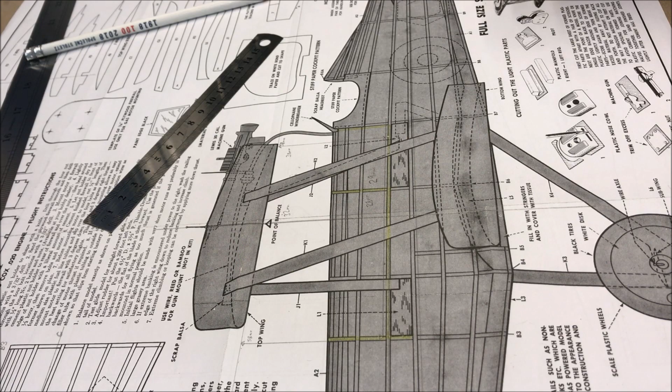Right, I have spent not some inconsiderable time thinking about this. I've not prepared anything, but blimey, here we are - I've made some of the formers in a solid state.

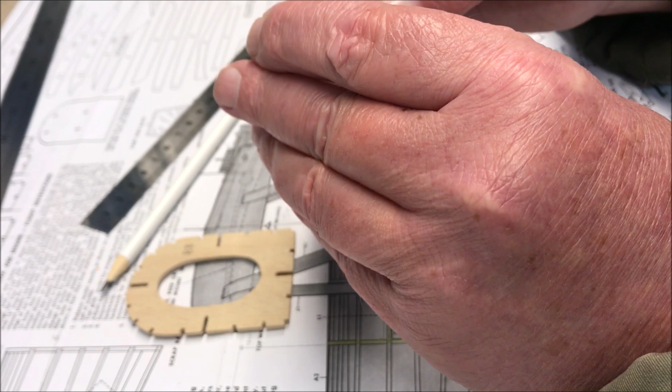You'll probably notice that B1 and B2 are almost identical, but obviously they come up like that. Now I'm going to finish these off sometime today by offering in the bottom bit, so I know where they slot in. So there's 1, there's 2, and there's 3. So they'll look like that. Okay.

I've also done the headrest as well. It goes on there like that.

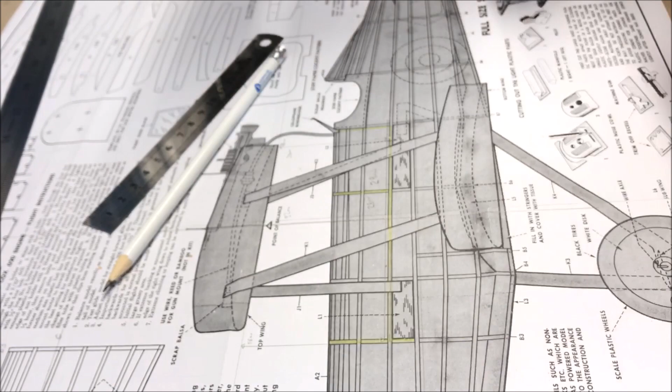Now, put a lot of thought into this, and I did some measuring because I trust these to be good drawings. So I'm going to need to put a hatch in. Now, I did consider going underneath, but I've got the wing here. But I have got quite a bit of space there and here. So I measured it. Now, originally I was going to put a hatch in along here to there.

And I thought, is that going to be big enough? And I thought, well, can I take it to the cockpit? Well, I've got this windshield here, so I can bring it forward to the cockpit, which means I've got to make 2 more formers here.

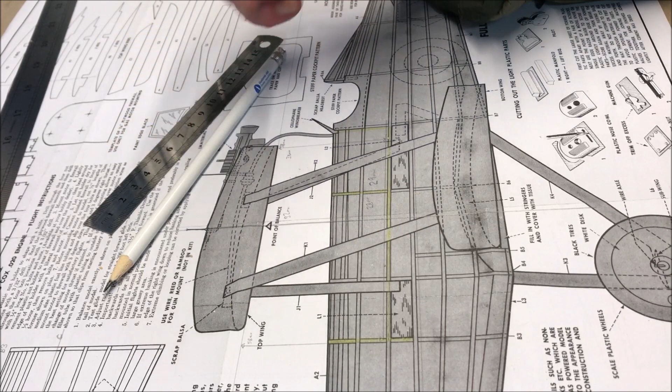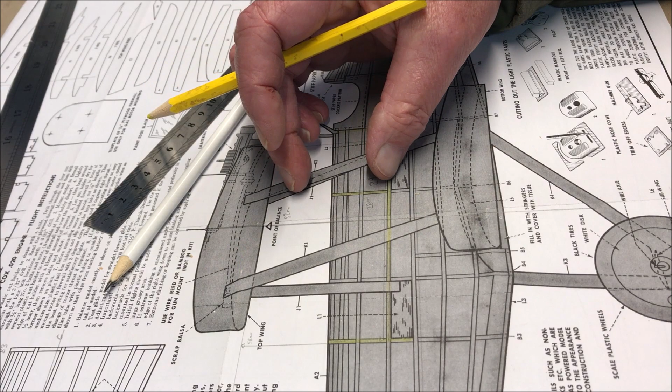Now between here and there, this is 28 millimeters, and I have a distance of 32 millimeters clearance from there to there. So if I do that as big as that, that gives me a 1 mil clearance there.

So I have to lift this up and pull it forward towards the propeller to get this out, and hold it in with a magnet here, a magnet here, depending on how many magnets I've got.

If you are stuck for magnets and you've got a broken motor, take the motor apart - there's magnets inside. They're absolutely brilliant, and they'll be free as well if it's a broken motor. Or maybe, actually, this is not going to be flying that fast, so maybe just a pair of magnets here this side and another pair the other side.

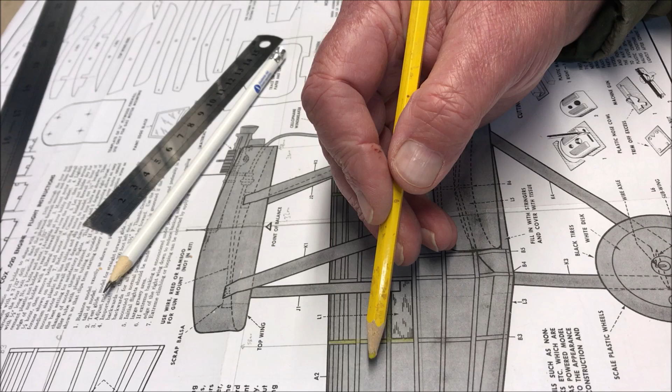And then, probably with a Dremel, take out some of this former here and get the battery as far forward as I can. I want to get as much weight as far forward as I can, because this here is what they call the point of balance. In the UK we call it the centre of gravity, or C of G.

Now, the only reason I've got as far as I have with these is because I've run out, and the shop opens tomorrow morning at 9 o'clock. So I'll be going down and getting some more wood and materials and stuff.

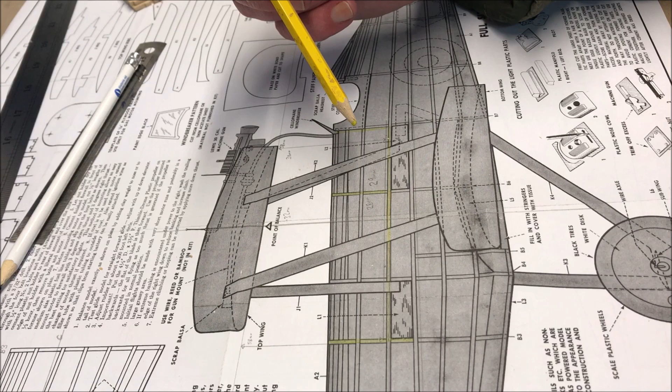And the reason I am thinking of doing certain things is I think I will make a fuselage to the plan, so I know what it physically looks like, and then I can make a second one using that method and then jig out what I want there.

But I do know that I've got to get all the weight as far forward as I can, because I think that tail is going to be quite heavy. So that's where we are with that.

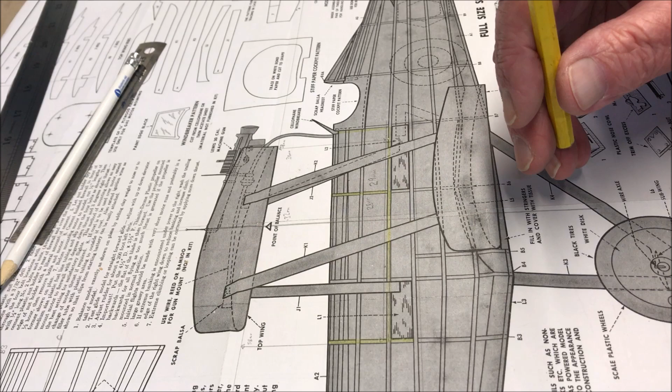Cliff came up with quite a good idea on his Nieuport - something I thought about using a bell crank in the wing to move the ailerons. Now, I haven't dismissed it out of hand or anything, but I've ordered 2 servos that are 1.7 gram. Now, if those servos fit inside the contour of the rib nice and neatly, I may use that.

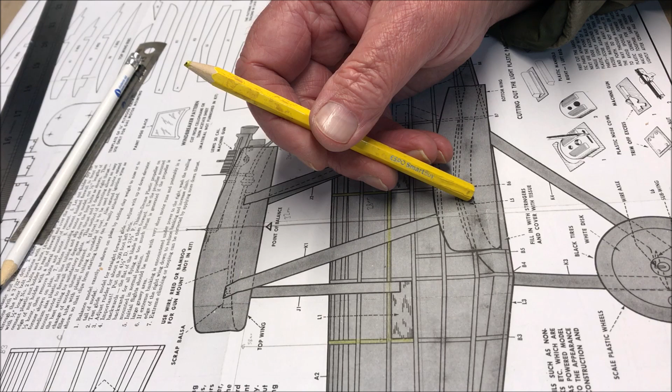If they don't, then I might pinch Cliff's idea with the bell crank, which is going to be a bit more work, but we'll see.

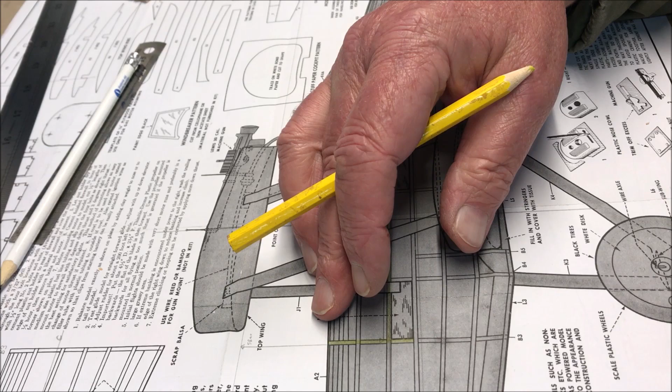So what I'm going to do is construct the fuselage as per drawing and instructions using the original parts, and then as I get momentum with that, will more than likely build a second one using that and compare both. And you know, if I've got enough materials, I can build 2 models out of this if I wanted to. Let's see what happens about that.

It could be quite exciting to do a comparison like that. Actually, do you know what would be really cool? If Tim and Cliff made one of these as well, and we had a bit of a competition, see which one flies the best. That'd be kind of cool. I don't know if they're up for that.

Yeah, actually, I could pinch their ideas and put it on video and use it on mine. That would be so cool if that could happen.

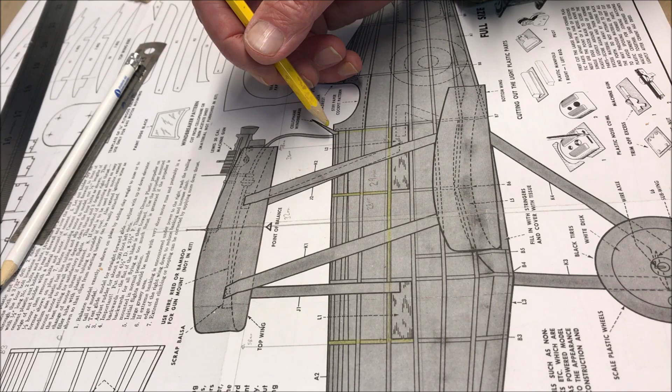Anyway, moving swiftly on. So I'm waiting for the shop to open tomorrow. I can get my servos. I know they've got the ones I want. They haven't got the 1.7, but I've ordered those. They'll get posted probably tomorrow when everybody goes back to work.

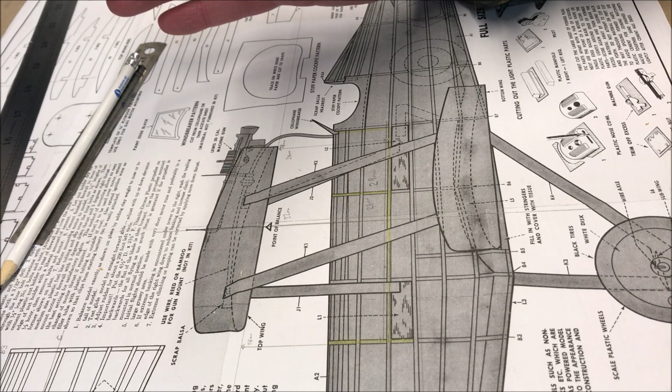And so then I can move rapidly forward. I'm going to start the fuzz, which means I've got to turn this over. And that's where we're going to be at.

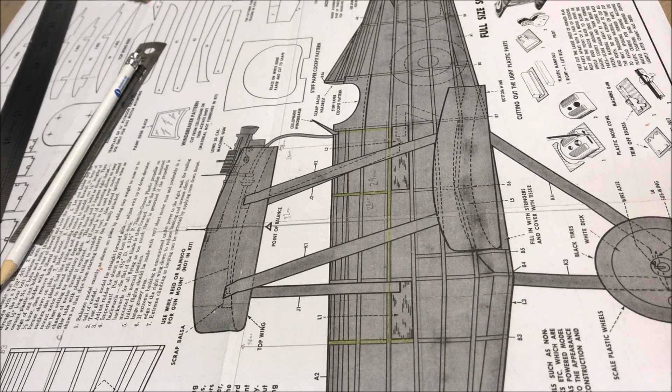I'm not going to look at the wings just yet, otherwise I'll be taking in too much information. But if I get to a certain place with the fuse, then I can look at the wings, because the wings I have to discover. I need to discover what certain things are for, and I think this is for the struts on the bottom wing, and this is the struts here and here for the top wing. And there's an F3, yeah, that's it.

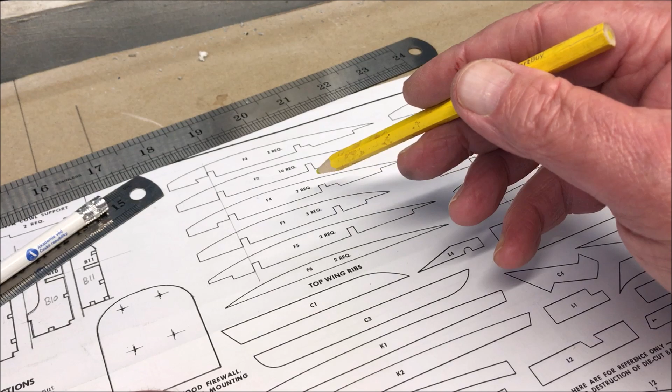Okay, so it's okay. I've been doing a lot of rummaging around. If you can bear with me, I'll turn the sheet over, which is the only complaint I have so far with this.

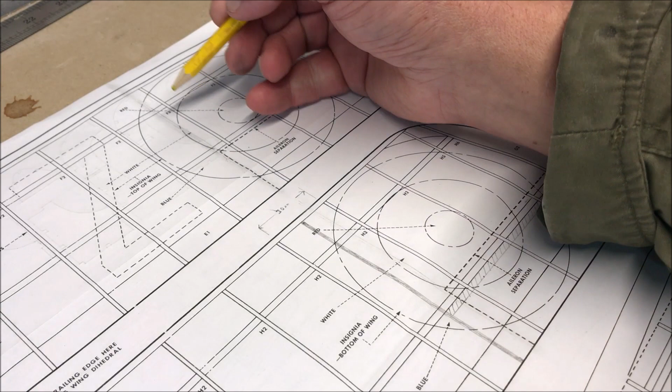This is what I'm thinking of doing. This is H3 and that's F3, so this is where the struts are going to go. I have to cut out the wing rib off the wood there and discover exactly where those struts go in relation to H3 and F3, because what I might do is add a rib here along there.

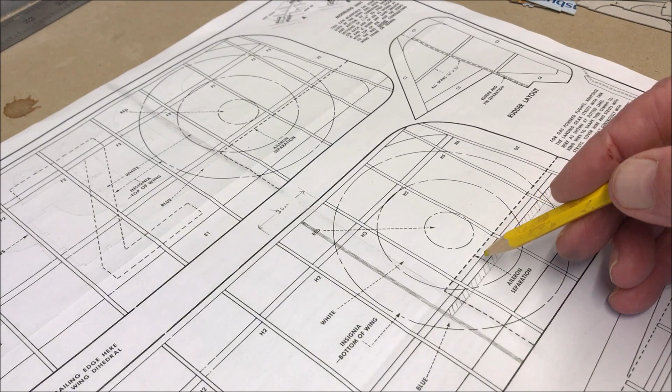This dotted line is the design for the aileron if you draw it on with a pencil, but obviously it goes forward of this strut here. So what I will do is add a strut there, bring that rib in there, and then make another quarter rib there, so I can make that into an aileron. And what I lose in this area here, I gain in this area here, in surface area, to make the aileron work efficiently.

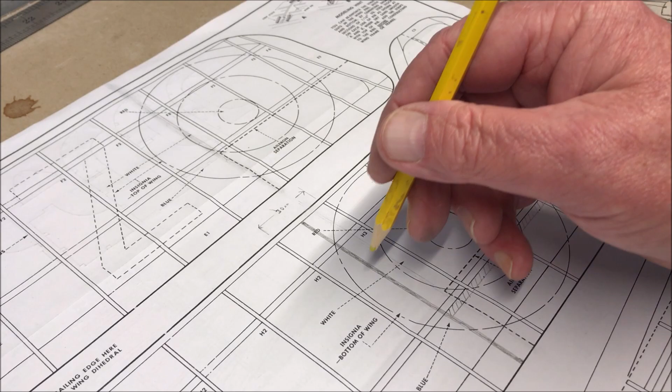And then what I might do is, I may or may not add ribs, I don't know, but what I will be doing is adding these forward ribs here, what I call a quarter rib, and I'll add them in here. Then I might add some stringers to the top to keep that aerofoil shape, because I want to get more lift out of this wing, make it more efficient. Yet it will add some weight to the wing, but it's not going to be that much.

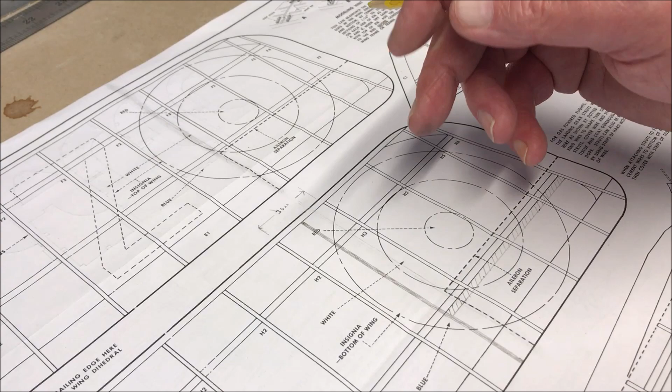But I have to concentrate on the bottom wing, because if I do put the servo in the bottom wing, which is the one that matters, this only needs a link then, and that's easy, not a problem at all. And I may do the same with the centre sections, probably add some ribs in there.

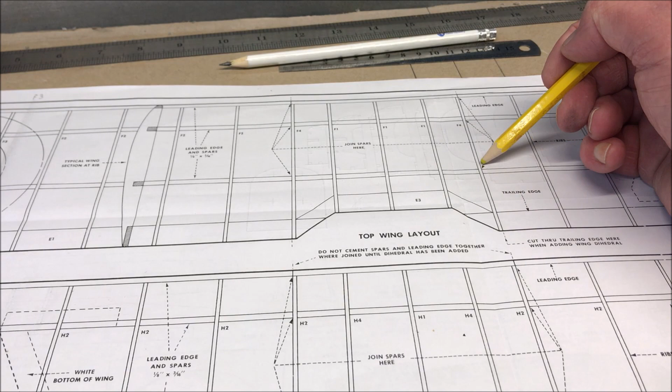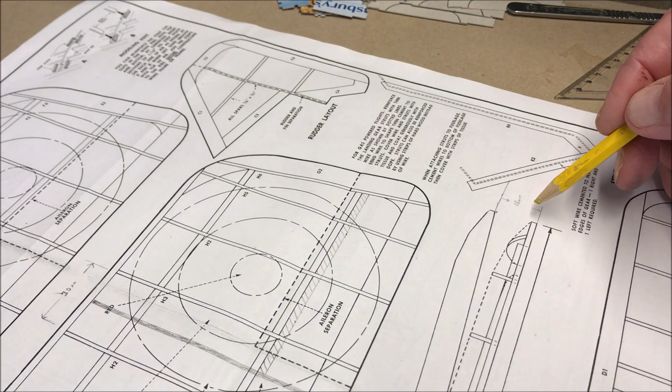Now, interestingly, I'm looking at the drawings and so forth, and they do not give an angle for that rib. So what I might do is add a rib on this side and glue it in at an angle. Now, this drawing here, if I go with that dihedral, from the flat bottom to the top of the dihedral is 18 millimeters either side. Now this shows the trailing edge.

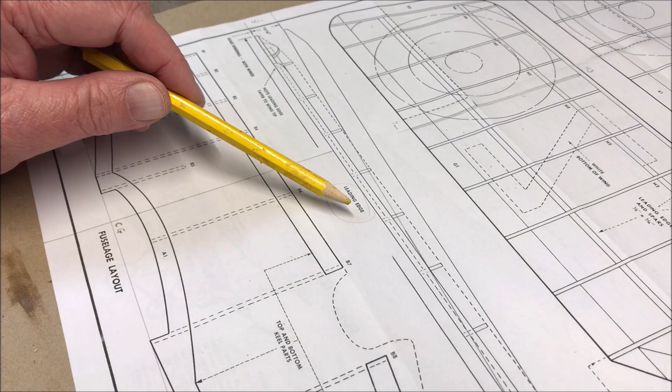This one shows the leading edge. So be aware of that if you're following this and making one, that this is the leading edge, that side's the trailing edge, and this is where that rib is, that rib there. So that's part of the centre section. In other words, if I put a dihedral in, it would be better if I add a rib with that angle on to get that dihedral.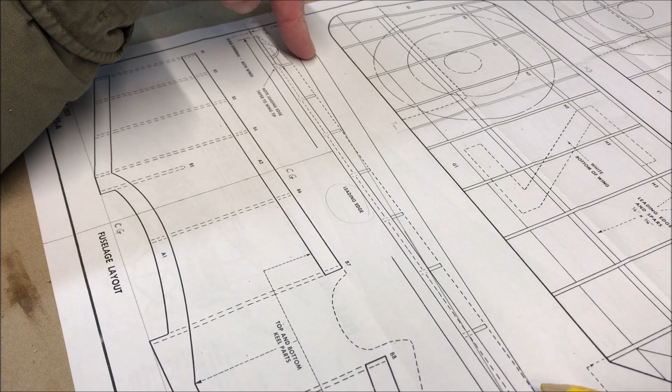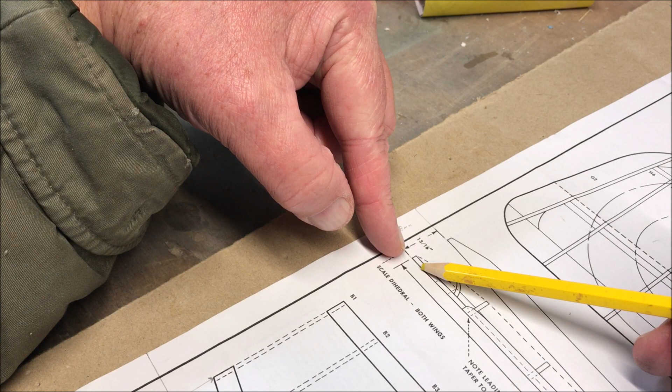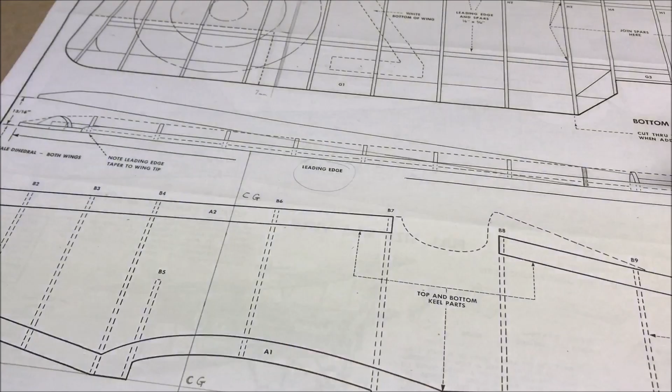Interesting question. If it is flat, then I won't need to do any of that shenanigans, I'll only need to do it on the bottom one. So there is the question: to flat or not to flat? Yeah, there lies the rub. So there we are with that at the moment.

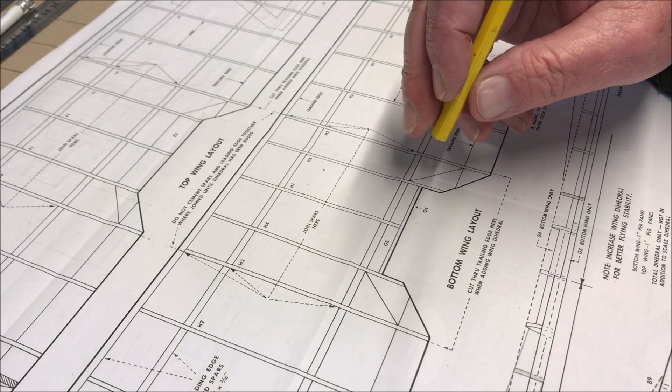So I think I'll end it here just for now, because I've got to get down the shops, get my servos. The others are on, they're in the post, I'll probably get them Monday or something, which would be for the wings. So I'll just concentrate on the fuzz for now, see how far I get, some spare wood in from the shop. The servos I'm intending to put inside the fuselage, around about here.

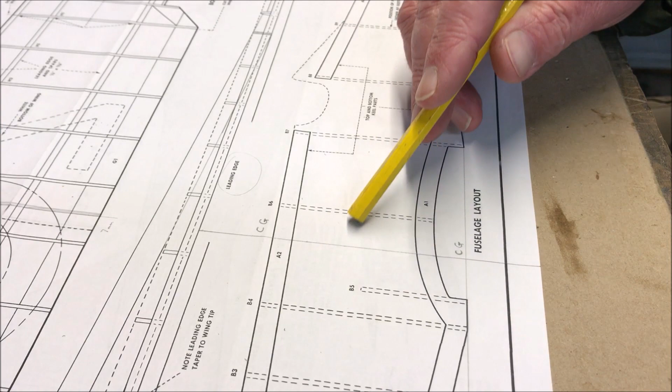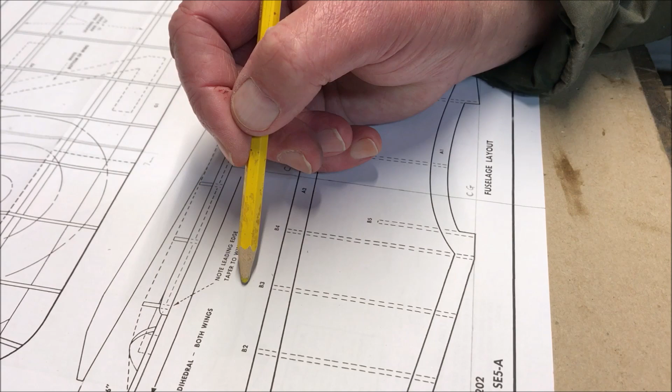So I'll use maybe a 4.7 gram twin servo. I've marked the C of G there, centre of gravity, so I'm going to try and push everything as far forward as I can to B3, which is there, that's B3.

So this becomes a hatch, battery goes that way. I've the height of B5.

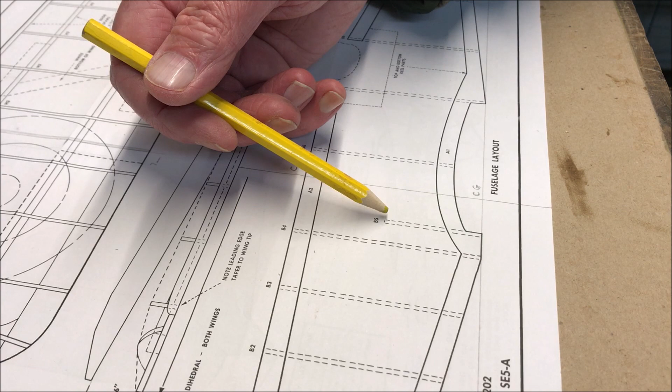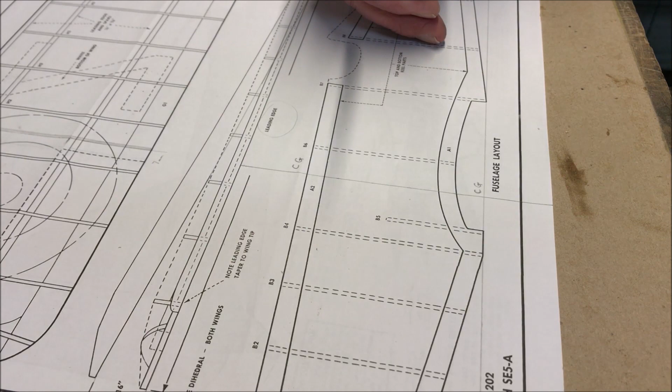Now obviously, like I said earlier, if I build this with the original parts, I may be able to put a servo tray here and have the servos upside down and then come through this way, which I think would work, or have them on the top. But the thing is, if I have them on the top, I'm going to have problems getting batteries in and out. So I might have to put the battery servos further this way, but I think that takes further investigation.

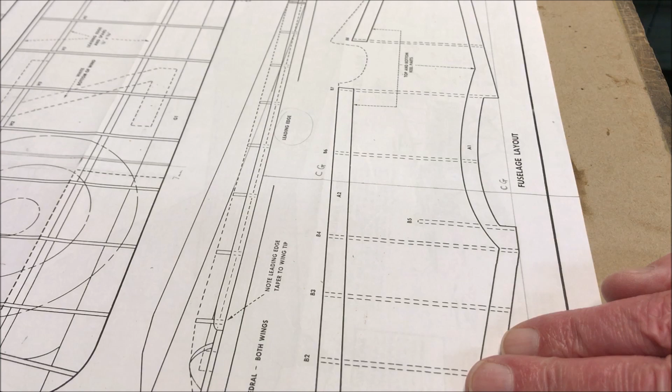So once I've got this in sort of one piece, or one half at least, I'll be able to muck around a bit with that and see how it turns out. So a lot of thought to that. Any ideas and suggestions will be most welcome. And there you go for now, that's the way I'm going to approach it, and I will get back to you as soon as I've got my bits. So there you go.